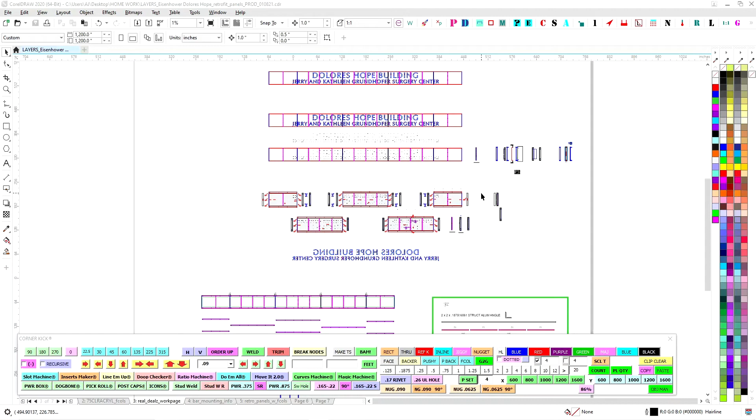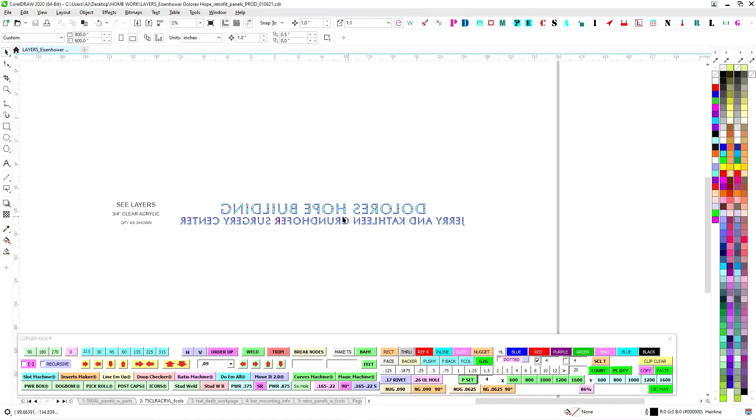All right, so the Dolores Hope retrofit panels. Let's go over these. Let's see. Got ourselves some 090. So you got the panels, got the end pieces, got some bracing. End pieces need to be welded in. Got these install guides there, and 3/4 inch acrylic that just needs to be tapped. And we're good. Not a whole lot to it.

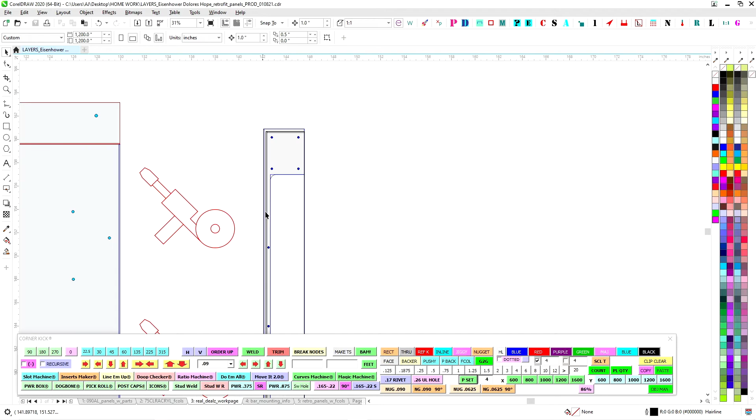So what you're going to do is bend up the panels, and each of these panels gets an end piece that gets welded in. That's just this piece here. And of course it's very thin right there, so be careful, but you just go ahead and weld in the ends on all of it. You got the full end caps here that cap off the whole thing.

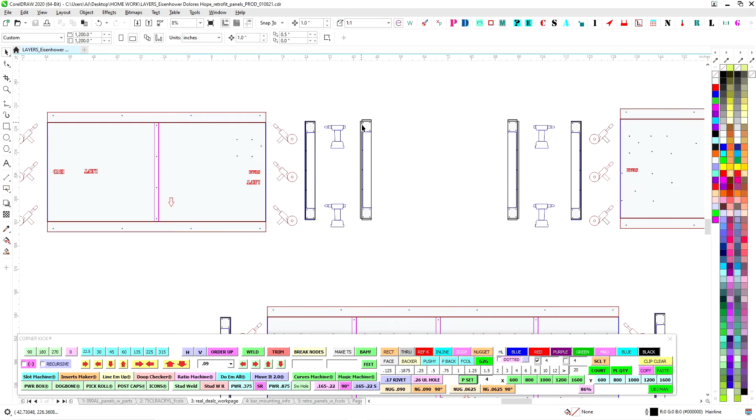And then you choose the ones that say seam. The ones that say seam get this reveal piece riveted to the end piece. So that's only on the two end cap pieces. They get a deal that gets riveted to it, and then the main center piece here that says center also gets these pieces riveted to it. So that creates the reveal. So when you go to put this together, you'll have this little step, and it'll look all sexy.

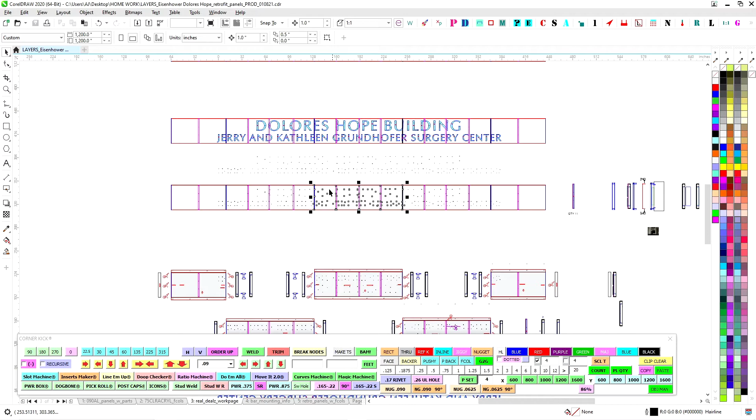So like I say, the main middle panel gets riveted, and then these two end pieces get this piece right here, bend it up 1, 2, 2, that gets riveted on. And then to try to give this a little bit of strength, a little bit of structure, we've got these thin little braces that get lorged in.

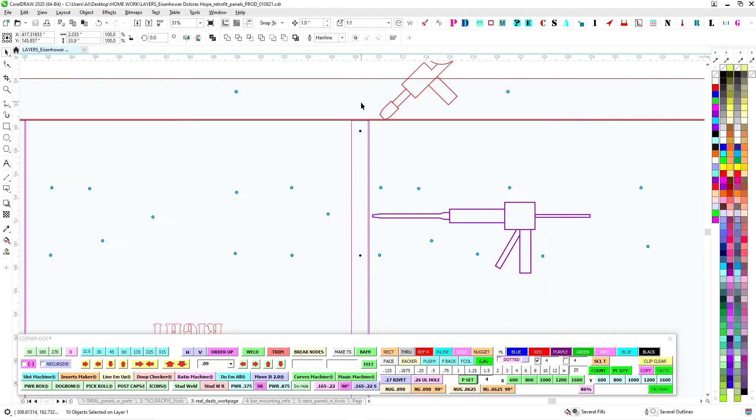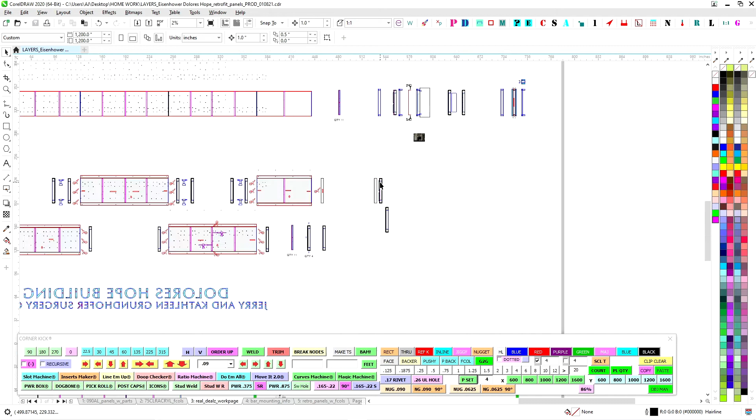What you're going to want to do is lorge those in, and then you want to tack the little ears to the side, so that way it gives this piece some structure, hopefully not to be too wobbly. So right where this piece here meets, just throw a quick tack right there after you lorge everything together, and that'll help give this some strength while they go to hang it on. So that's it for fab on that part. Just get these all welded together, lorged together, and they're good.

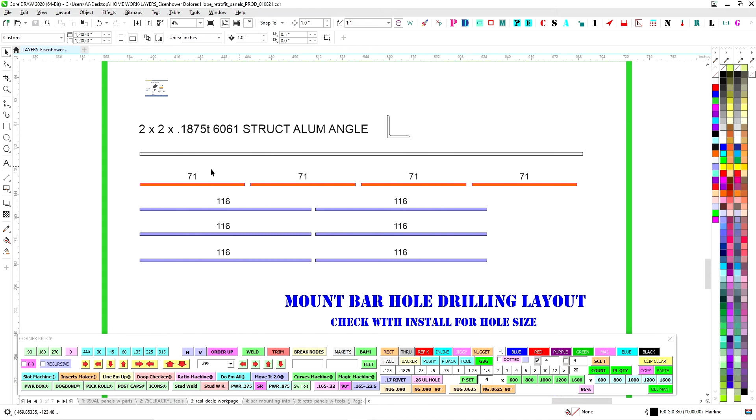And then the other part will be hand cutting all the mounting bars. So you brought in some 2x2 by 3/16 structural. So you should be able to get them all out of here. So you're going to do 4 71s, and you're going to do 6 of these here, 116. And then this is your drilling template or layout anyway.

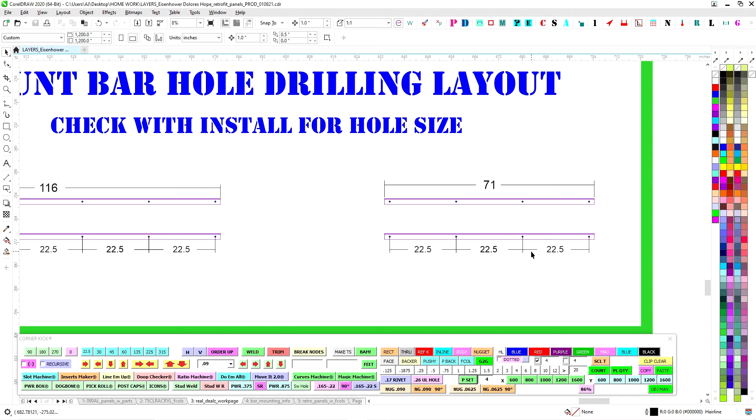So 22.5. Check with install whether they want 3/8 or 1/2 inch holes on this, whatever they're using, togglers or whatever. But just go ahead and drill it out. Just put it in the center of the bar. Call it good. It doesn't have to be perfect because each one's just getting mounted on its own. It doesn't have to follow a template or a pattern.

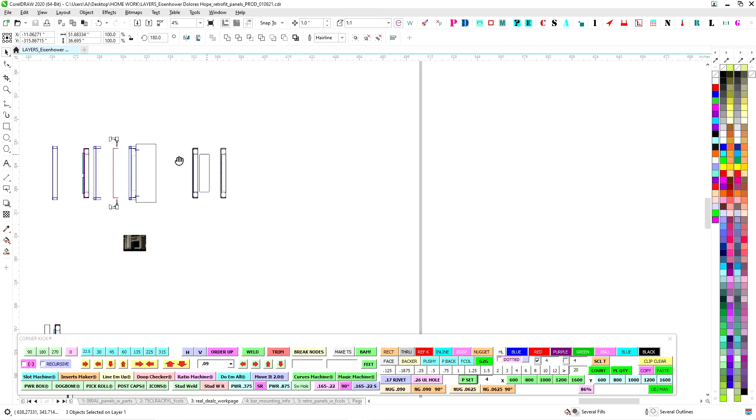For the guides for install, what you're going to do is just rivet these together. All the flanges go to the outside. So have the flanges face up and have these flanges face out, and just go ahead and rivet these together. And you're just going to make these little jacks. There should be 3 of those. Make sure install gets those.

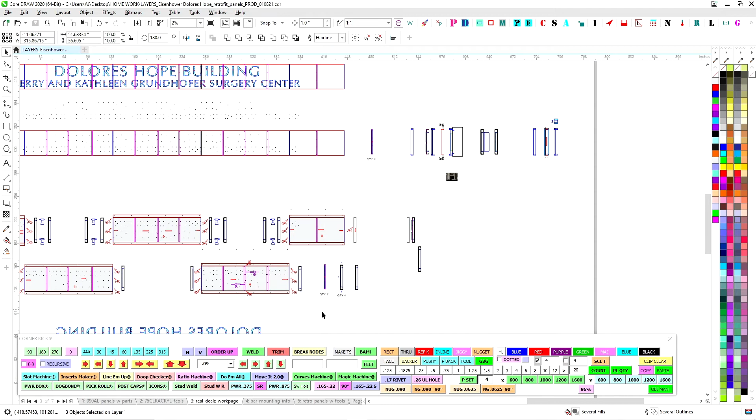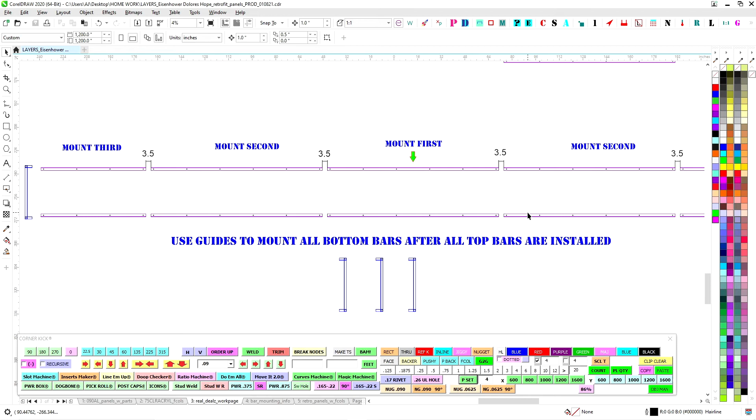And then for install's purposes, like we talked about before, you're going to mount the middle bar first, get it all leveled up, and then it's 3.5 inches apart from every bar, and then you've got your little 71 inchers at the ends. Get all of the top bars mounted flat and level to each other first, then use the guides to distance the bottom bars from each other and just kind of get them lined up and mount them. And then once that's all mounted, this should be good to go to mount it up. I made a smaller sheet that is printable for install to follow.

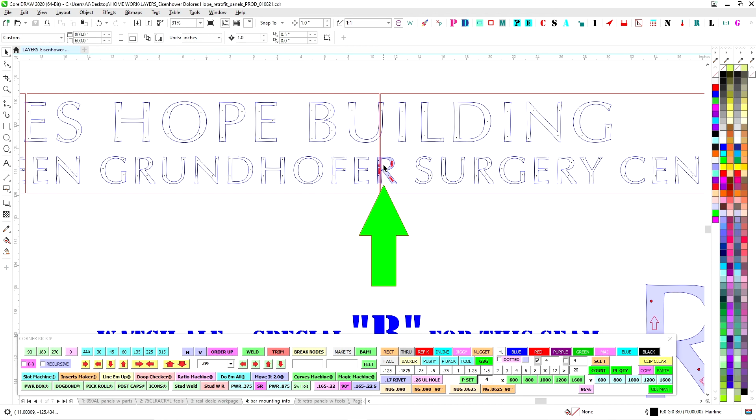Another thing for install, make sure that you get this: one of these R's had to be separate because it fell right on the seam. So it's a little different than the rest of them. All the other letters are universal. They can be changed out, but look out for this particular R. It'll have seam written on it, but it won't fit in any of the other R's. So just keep that in mind.

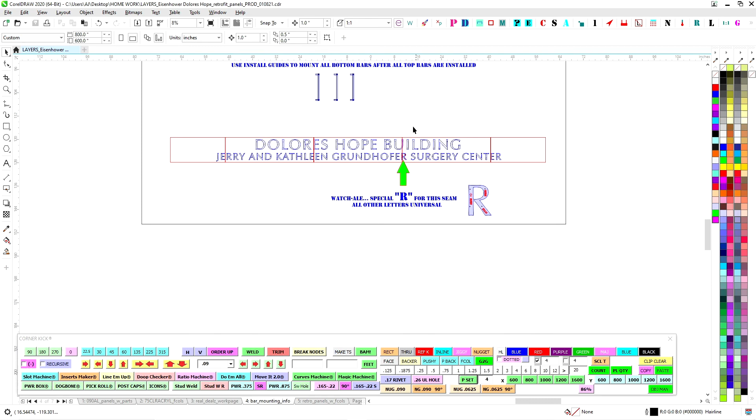But otherwise it should be pretty straightforward as far as install goes. Just watch that 3.5 inch spacing in between each bar, and it should be successful. But I made this here so this will fit on an 11 by 17. You should be able to print that out. Make sure install gets that. So otherwise, ignore all this. This was just another direction we were going. So this is the real deal right here.

Anyway, hit me up with any questions if you have any.